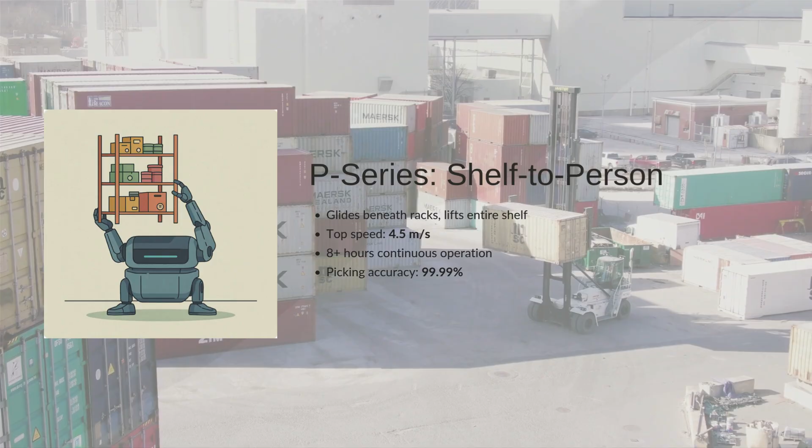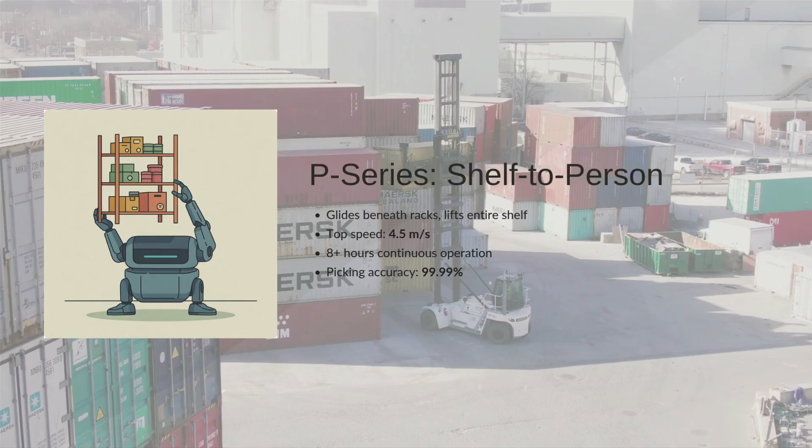These machines operate with incredible speed and endurance. P series robots reach top speeds of 4.5 meters per second and can work continuously for over 8 hours under rated payloads. Most importantly, the system eliminates human travel time and achieves a near-perfect picking accuracy of 99.99%.

For warehouses that manage a vast variety of small items, storage density is the top priority. To solve this, Geek Plus developed the RoboShuttle system, a tote-to-person solution that utilizes the tall RS series robots.

These machines feature tall vertical columns equipped with double forked retrieval arms. Unlike standard rolling AMRs, RoboShuttle robots can reach heights of up to 11 meters, driving down narrow racking aisles and retrieving individual totes directly from high bay shelves.

The robots retrieve multiple totes on a single run and transfer them to standard P series robots, which then ferry the totes to picking stations. This hybrid setup maximizes vertical space utilization.

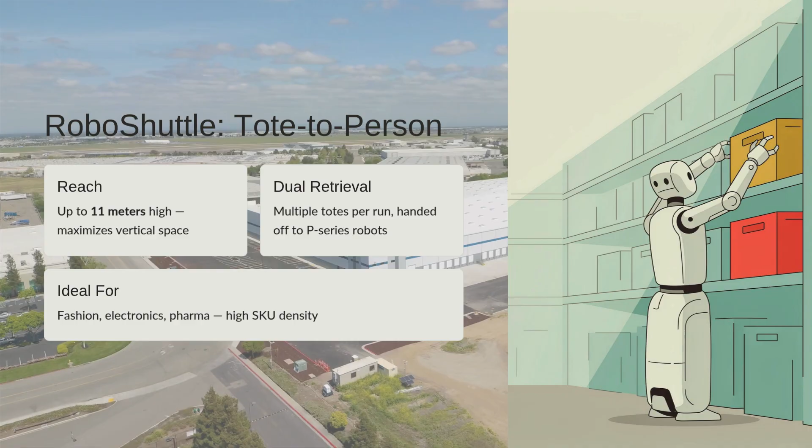It is ideal for industries like fashion, retail, electronics, and pharmaceuticals. In these sectors, facilities must store hundreds of thousands of different SKUs in a compact, organized footprint.

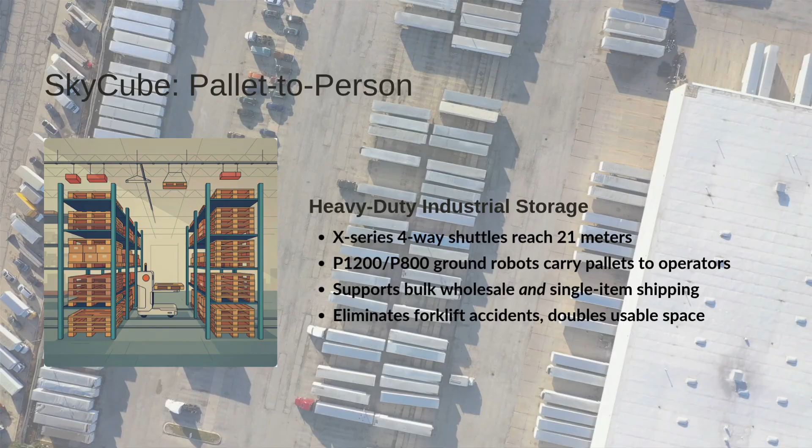When a warehouse must handle heavy palletized material alongside standard individual items, they require the SkyCube system. This pallet-to-person solution is designed for heavy duty industrial storage, combining an automated storage structure with rolling ground robots.

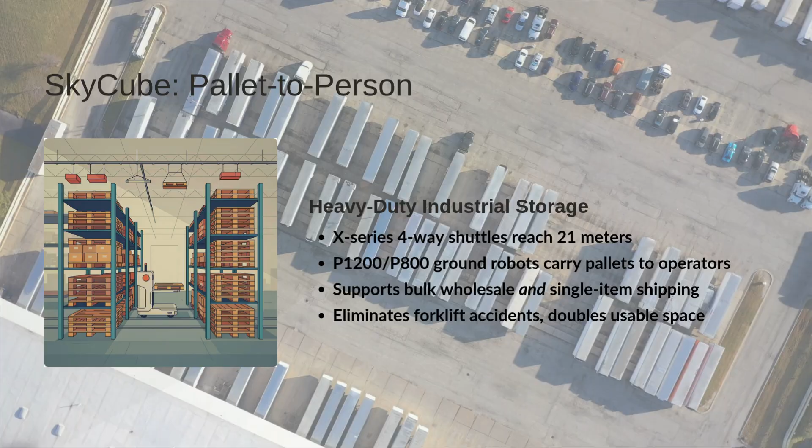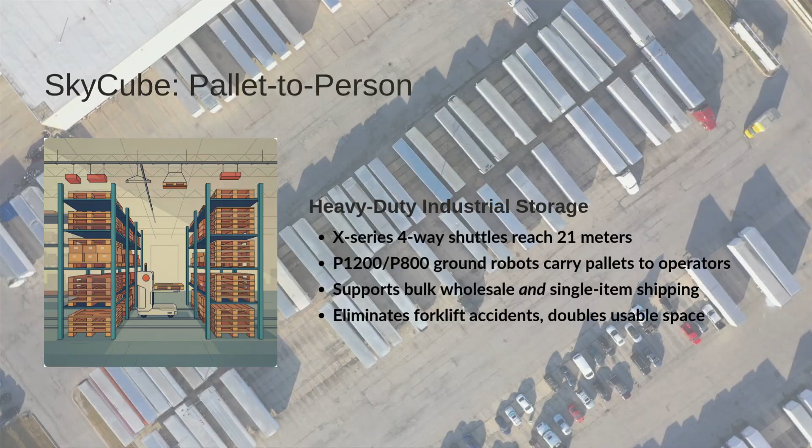In the upper levels of the racking structure, X series four-way shuttles glide along rails, storing and retrieving entire pallets at heights of up to 21 meters, utilizing the full vertical clearance of the building.

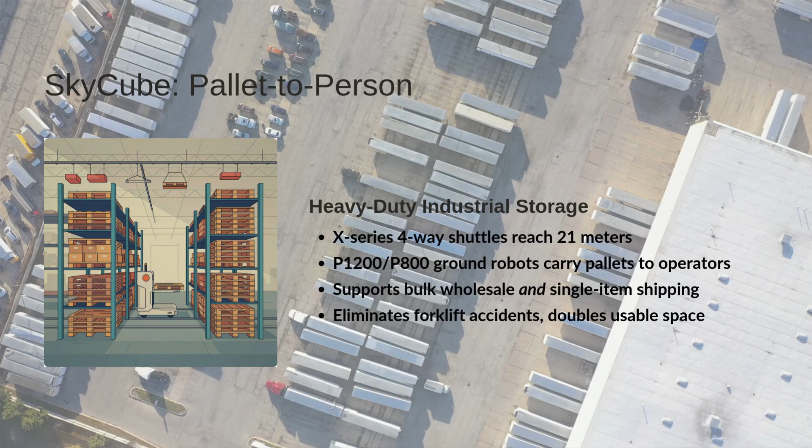When a pallet is needed for picking, the shuttle delivers it to a vertical lift, which lowers the pallet to the ground. There, a ground level AMR such as the heavy-duty P1200 or P800 retrieves the pallet and carries it to an operator.

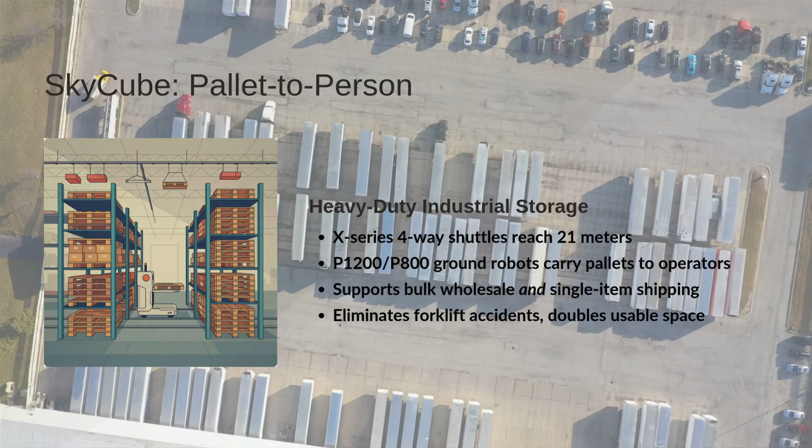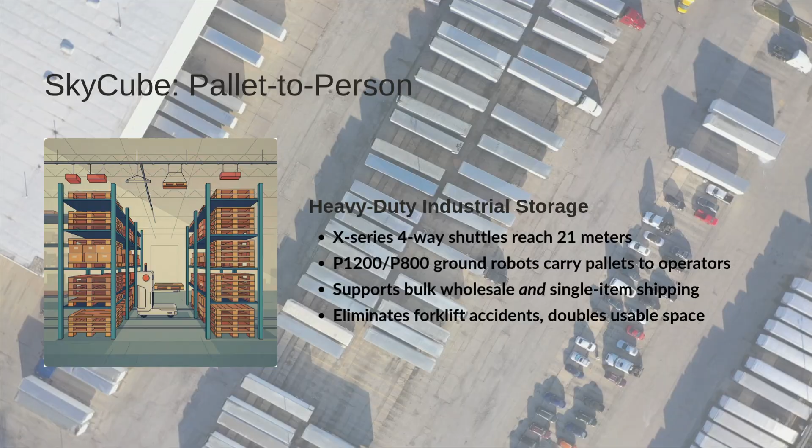This unified system supports both bulk wholesale fulfillment and detailed single item consumer shipping in a single high density footprint. It completely eliminates forklift accidents and reduces labor intensity while doubling usable space.

E-commerce distribution hubs and postal couriers handle a relentless stream of outgoing parcels. They require rapid, flexible sortation. Geek Plus addresses this with its Fleet Sort solution.

It then glides across a flat floor toward the correct chute. Traditional sorting systems require expensive, permanent steel platforms. Fleet Sort operates at ground level with no fixed infrastructure.

This makes it incredibly easy to install and expand. Companies can scale up sorting operations simply by adding more S series robots to the floor during peak seasons, boosting parcel throughput up to 10 times without heavy construction.

Beyond warehouse picking and sorting, industrial factories require flexible material transport. Geek Plus smart moving solutions automate these transit tasks. This segment utilizes the M series latent mobile robots and the F series autonomous forklifts.

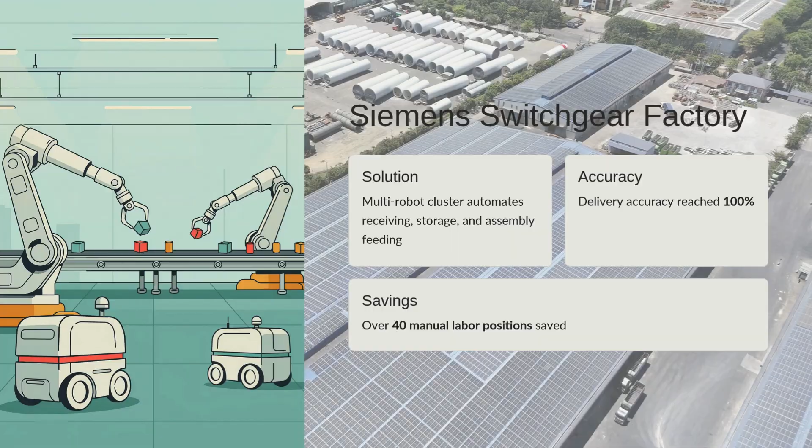In the manufacturing sector, lean material flow is vital to keep production lines running smoothly. Shanghai Siemens Switchgear Co. Limited achieved this by partnering with Geek Plus. In a phased rollout, Siemens upgraded its flexible intelligent factory with four types of Geek Plus robots. The multi-robot cluster solution automates the entire logistics chain, including raw material receiving, in-store stock management, and production line feeding.

Geek Plus MP1000 robots deliver materials for circuit breakers based on real-time assembly demands. This precision logistics model reduced the space required next to production lines by half. The factory's delivery accuracy reached an incredible 100%. Furthermore, the automated solution allowed Siemens to save over 40 manual labor positions, significantly lowering manufacturing operational costs while ensuring continuous, uninterrupted production across complex and dynamic manufacturing floors.

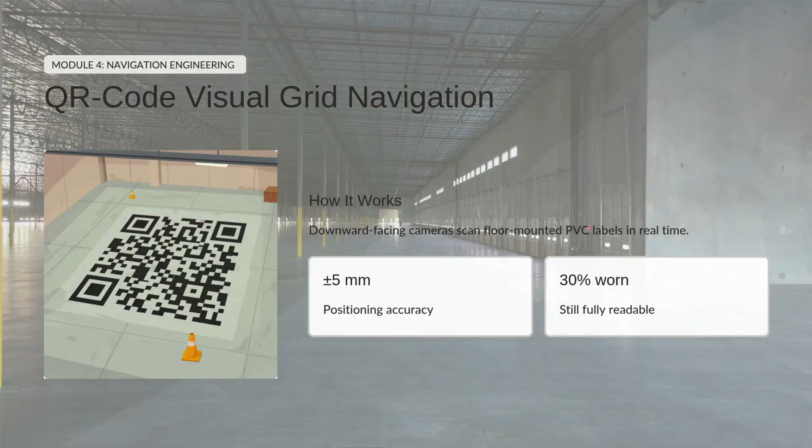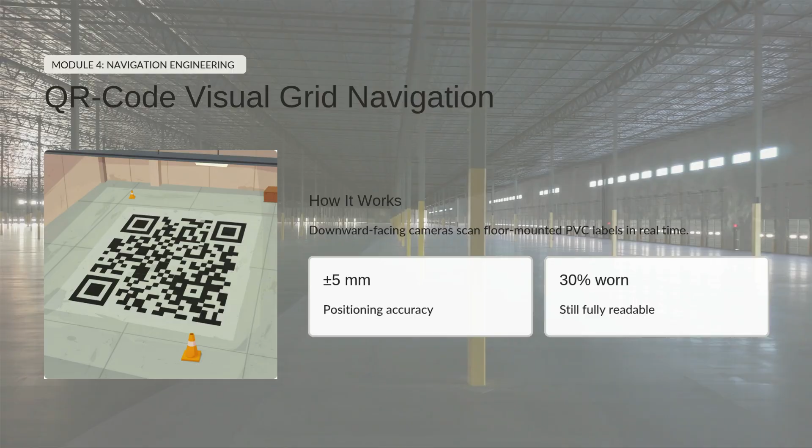To move safely and efficiently, warehouse robots must navigate with extreme precision. The most common and cost effective navigation method is the QR code visual grid. In G2P zones where human foot traffic is restricted, a grid of QR codes is laid on the floor. Downward facing cameras on the AMRs scan these labels in real time, allowing the robots to track their exact location.

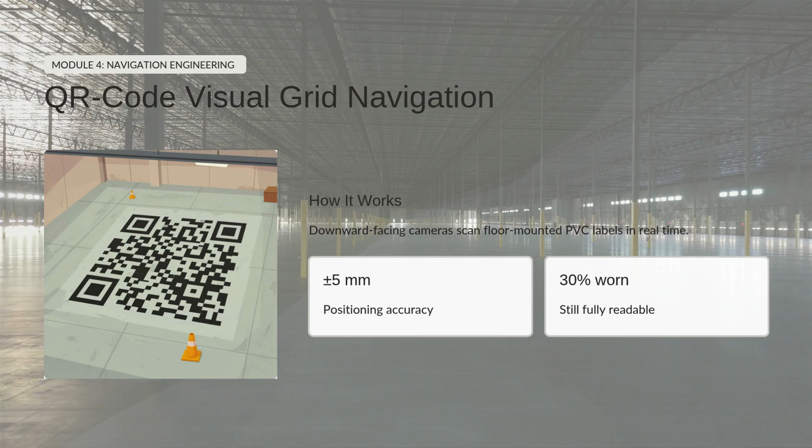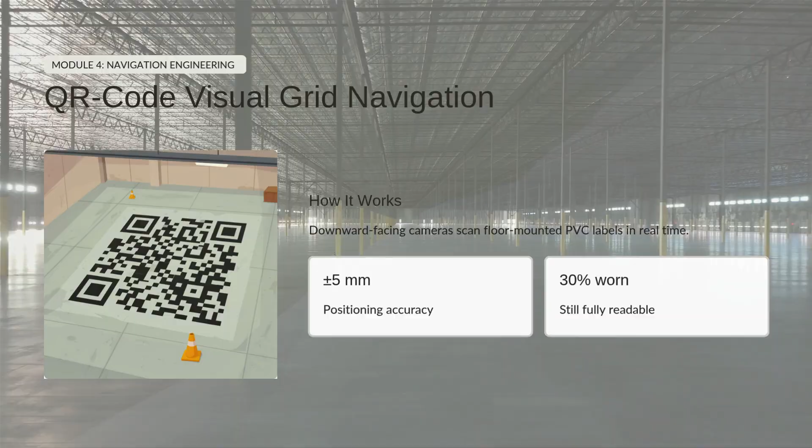The physical labels are typically compact PVC plates secured with heavy duty adhesive. They are highly resistant to water, dust, and wear, remaining fully readable even if up to 30% of the surface is scratched or covered in dust. This navigation method provides a high positioning accuracy of 5 millimeters. This precision is essential to prevent tracking errors when AMRs carry heavy payloads of up to 1,200 kilograms.

While QR codes are excellent for structured zones, they are difficult to maintain in heavy traffic environments.

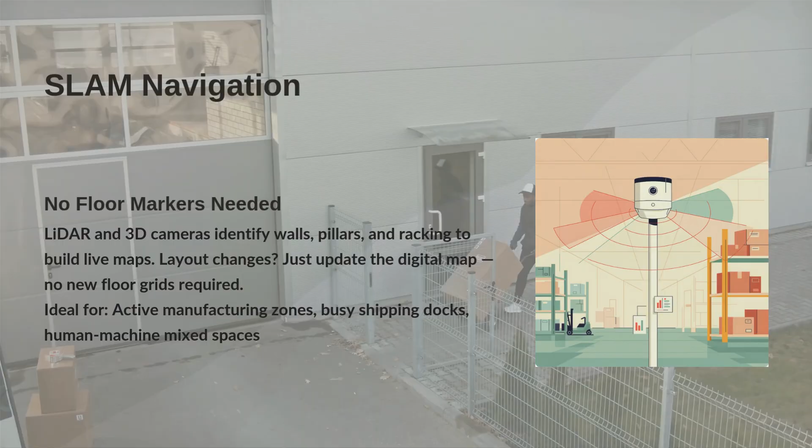In dynamic human machine mixed spaces, Geek Plus utilizes SLAM navigation, which stands for Simultaneous Localization and Mapping. This advanced technology allows robots to navigate without physical floor markers. Instead, the AMR uses its onboard LiDAR and 3D cameras to scan the surrounding environment. It identifies natural landmarks such as walls, pillars, and racking columns to calculate its position in real time. This gives the robot extreme flexibility.

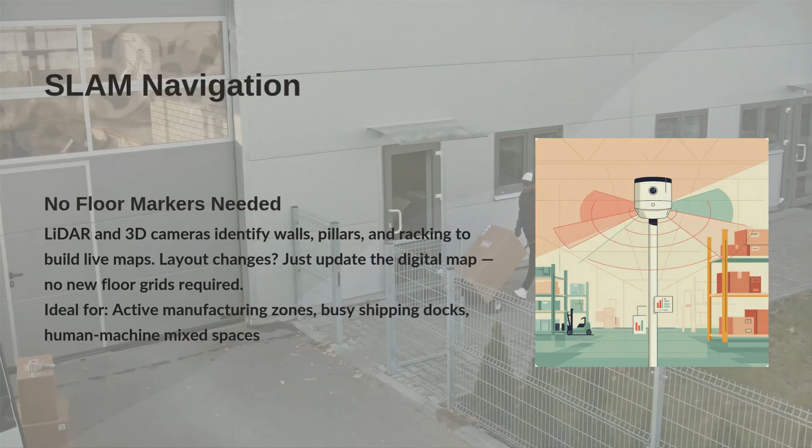If a factory layout changes or a production line is adjusted, engineers do not need to lay new floor grids or paint magnetic lines. They simply update the digital map in the software suite. This makes SLAM navigation the ideal choice for active manufacturing zones and busy shipping docks.

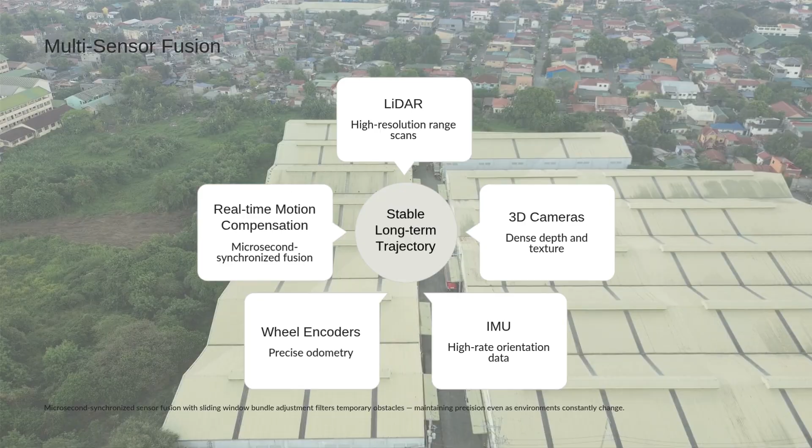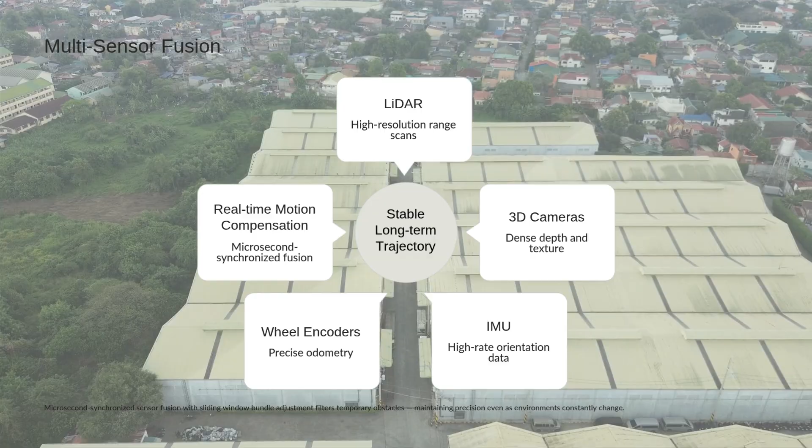Industrial factory floors are incredibly challenging environments for robotic sensors. Surroundings change constantly as materials are moved and employees walk by. To maintain precise positioning, Geek Plus AMRs employ a closely integrated multi-sensor framework. A high-speed processor fuses real-time inputs from LiDAR, 3D cameras, inertial measurement units, and wheel encoders. This sensor fusion is synchronized down to the microsecond.

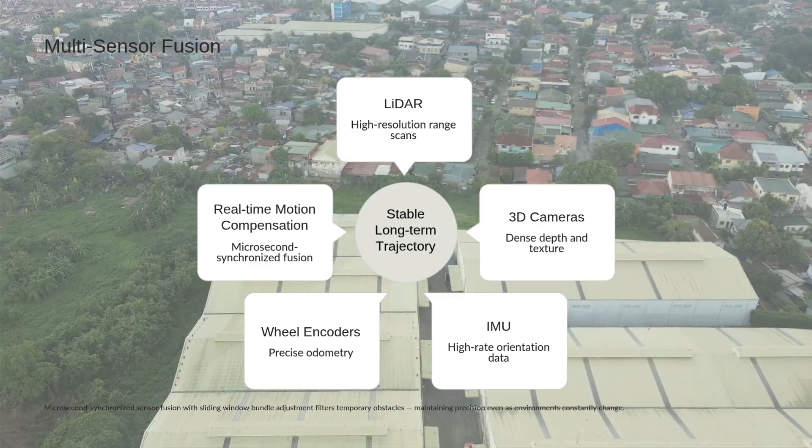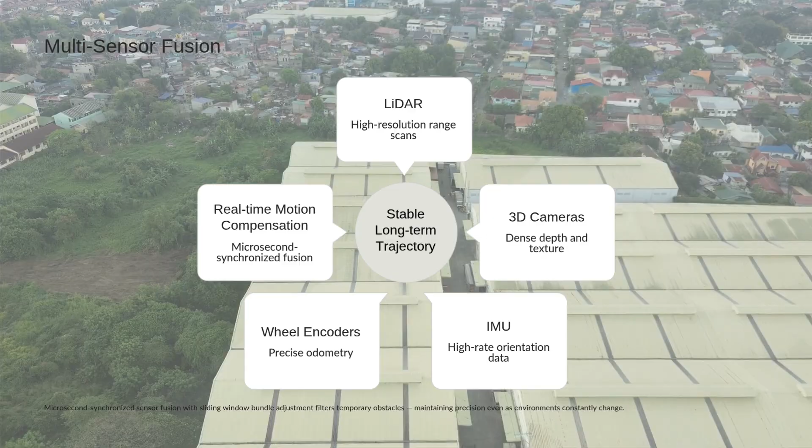Additionally, rotating LiDAR sensors can experience scan distortion when the AMR moves at high speeds. Geek Plus's SLAM algorithm resolves this by using IMU and wheel speed data. Furthermore, the mapping software uses sliding window, bundle adjustment, and marginalization. This allows the robot to automatically filter out temporary obstacles. It maintains trajectory accuracy over months of active floor runs, ensuring stable operation even when environmental layouts change constantly.

To build high quality AMRs at scale, Geek Plus constructed a groundbreaking manufacturing facility in Nanjing. This is the world's first smart factory where robots manufacture robots. The Nanjing facility replaces traditional static conveyor assembly lines with a flexible island production mode. In this setup, autonomous mobile robots carry components between decentralized assembly stations, while robotic arms, automatic tightening machines, and smart cameras work in sync to assemble new robots.

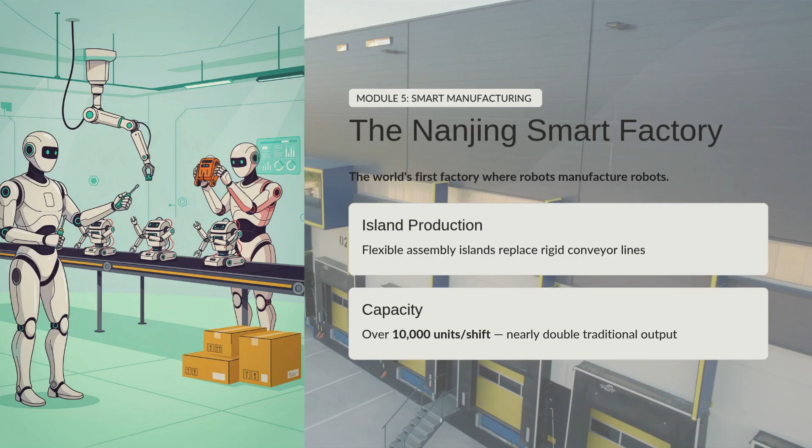This flexible model allows Geek Plus to quickly adapt to customization requests and shorter product life cycles. It also doubles the factory's production capacity compared to traditional manual lines, reaching an annual capacity of over 10,000 units per shift. The Nanjing smart factory serves as a brilliant showcase, proving the value of mobile robotics by applying the technology directly to Geek's own volume manufacturing processes.

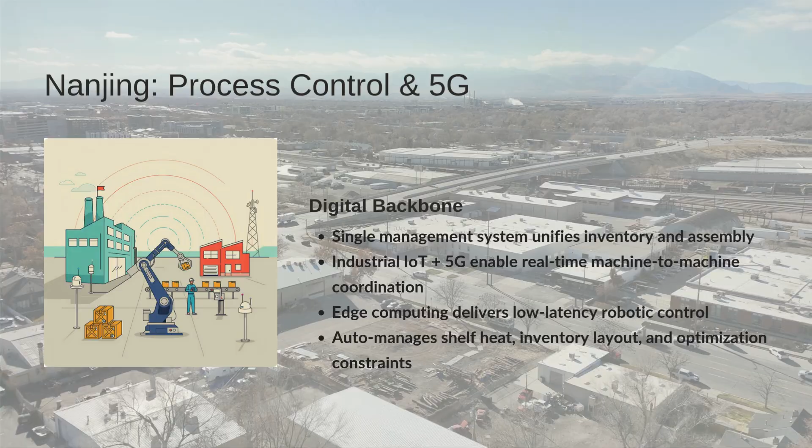Operating a fully automated factory requires a powerful integrated software backbone. The Nanjing facility utilizes the Geek Plus production logistics management system. This system unifies the management of inventory, storage, and active production lines. It connects the warehouse area with the assembly zone to ensure a seamless flow of parts.

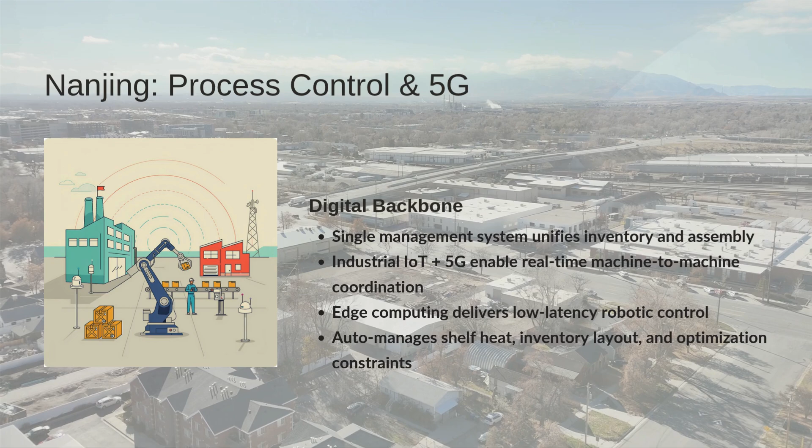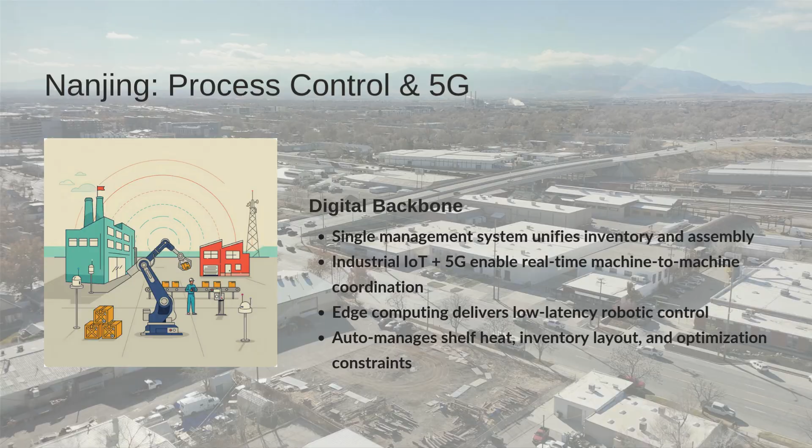To coordinate this complex process, the facility leverages industrial IoT sensors and high speed 5G wireless connectivity. This enables real time machine to machine communication across the board. Combined with edge computing, the local manufacturing execution system can control robotic movements with minimal latency. This digital network ensures that materials are delivered to assembly islands precisely when needed.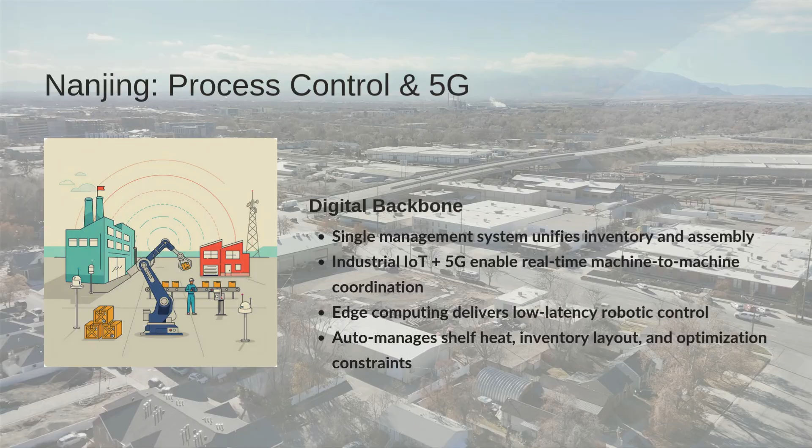The smart operating software automatically manages inventory layouts, optimization constraints, and shelf heat parameters in real time. This unifies diverse fleets into a single cohesive manufacturing flow.

Beyond boosting production volume, the automated systems at the Nanjing facility ensure exceptional quality control. Human assembly lines are vulnerable to fatigue and physical errors. The robotic assembly islands execute tasks with absolute repeatable precision. This high accuracy has allowed the factory to achieve a straight-through assembly pass rate exceeding 98%, minimizing the need for manual rework and product repairs.

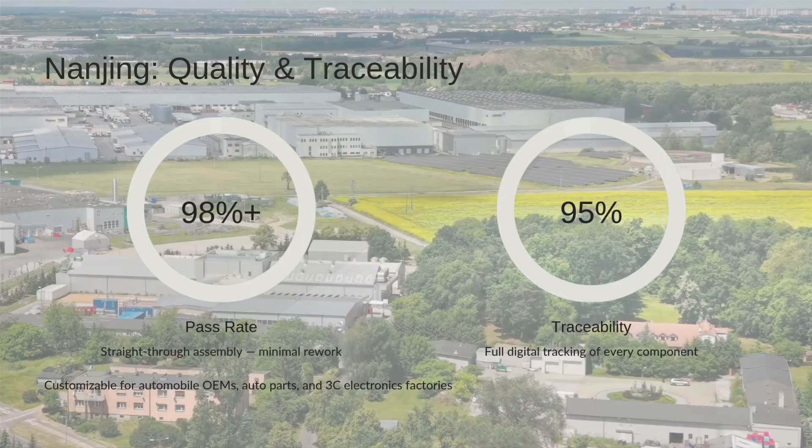Additionally, the integrated software provides full digital tracking, achieving an outstanding material traceability level of 95%. Every single component in a new AMR is recorded and tracked. This deep data transparency optimizes inventory management, reduces waste, and lowers the factory's overall management overhead cost. It is customizable to automobile OEMs, auto part factories, and 3C electronics factories, providing concrete business cases for complete industrial automation in modern manufacturing environments.

While Nanjing focuses on flexible assembly technology, the Hefei facility serves as Geek's primary center for volume production and global export preparation. This massive base builds and tests thousands of AMRs before shipping them overseas.

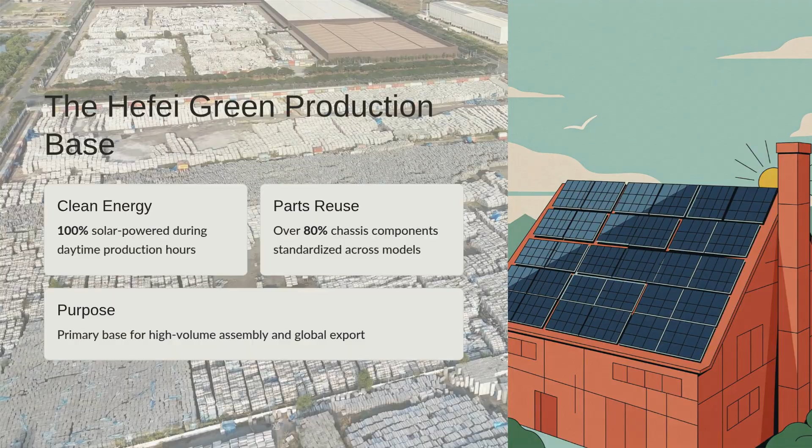To align with modern sustainability goals, the Hefei facility operates under a comprehensive ESG program. The factory integrates solar photovoltaic technology on its roof, allowing the facility to achieve 100% clean renewable energy usage during daytime production hours.

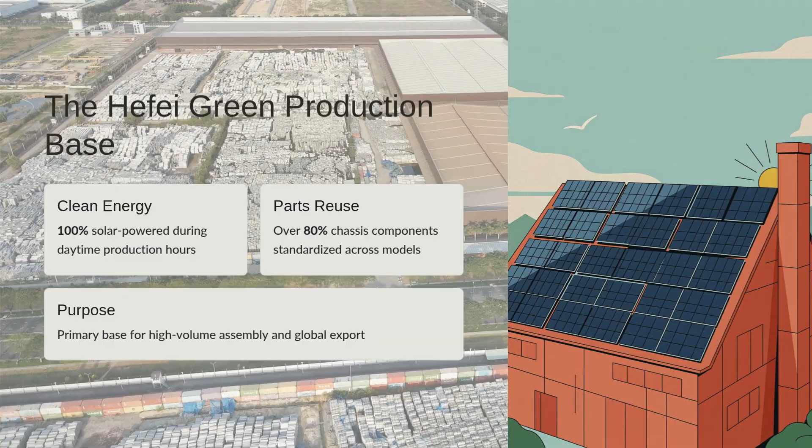To reduce material waste, Geek Plus engineers have standardized their designs, achieving over 80% chassis parts reuse across different robot models. Standardized robots drive directly into the factory's calibration area. They undergo final parameter setup, visual inspection, and severe environmental simulation testing under load before unboxing and international shipment, establishing a new global benchmark for sustainable green logistics.

While the technology matures, the international robotics market is facing sudden geopolitical challenges. On July 28, 2026, the landscape changed significantly under Public Notice DA 26786. The United States Federal Communication Commission added foreign produced advanced robotic devices to its covered list. This regulatory action restricts the import, marketing, and sale of new robotic models that do not already hold an FCC equipment authorization.

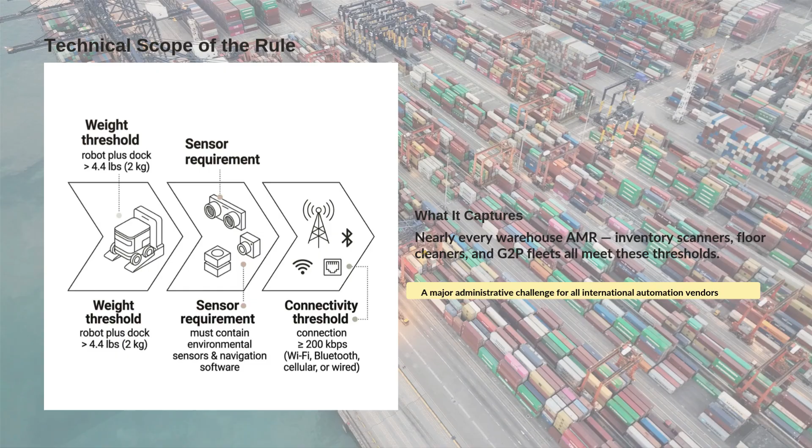Connected ground robots collect sensitive spatial data, camera feeds, and facility layouts. This regulatory shift represents a concerted effort by the US administration to secure its logistics networks, protect privacy, and encourage domestic manufacturing. To understand the impact of this regulation, we must examine its precise technical definition.

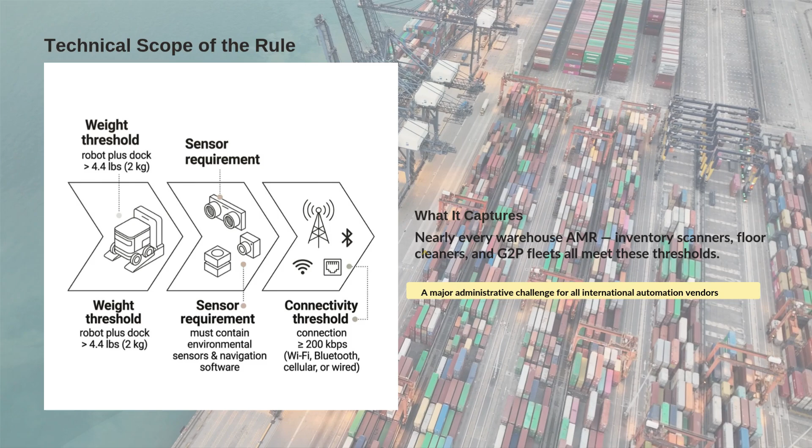The FCC covered list update is far wider than humanoid robots. It applies to any ground based mobile device that meets a specific set of thresholds. First, the combined weight of the robot and its docking station must exceed 4.4 pounds, or roughly 2 kilograms. Second, the device must contain environmental sensors and navigation software.

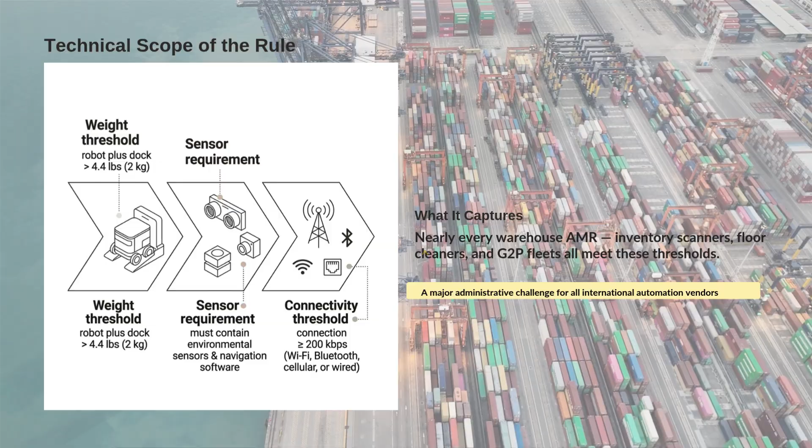Third, it must possess a component providing network connectivity of at least 200 kilobits per second. This includes wired, Wi-Fi, Bluetooth, or cellular connections. This technical definition comfortably captures almost every autonomous mobile robot used in warehouse logistics.

While the FCC regulation is broad, it contains several important exclusions that protect specific industries. The legal definition never turns on human shape; it focuses strictly on mobile ground autonomy. Consequently, fixed stationary industrial robotic arms are explicitly excluded. This includes multi-axis articulating SCARA and gantry arms bolted to factory floors.

Medical devices regulated under separate health and safety acts are also exempt. This includes surgical robotic systems, prostheses, and powered wheelchairs. Furthermore, unmanned aerial vehicles and drones are not covered, as they are regulated under separate restrictions. Finally, standard connected road vehicles and trains are excluded. If your automation is a bolted down arm on a production line, this rule does not touch it.

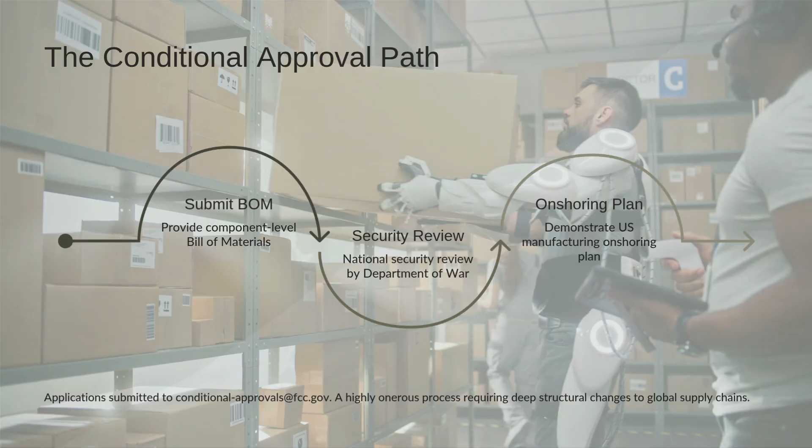For new uncertified foreign robot models, there is only one path back into the United States market. The regulations build in an administrative escape hatch called conditional approval, and any entity involved in producing the device, including OEMs and contract manufacturers, can apply.

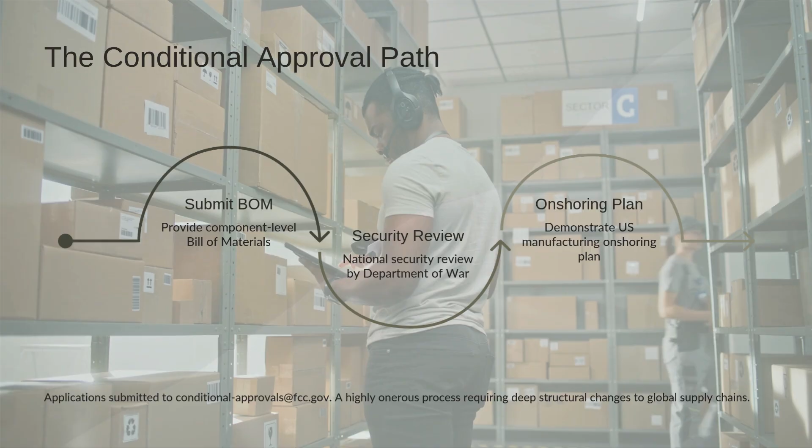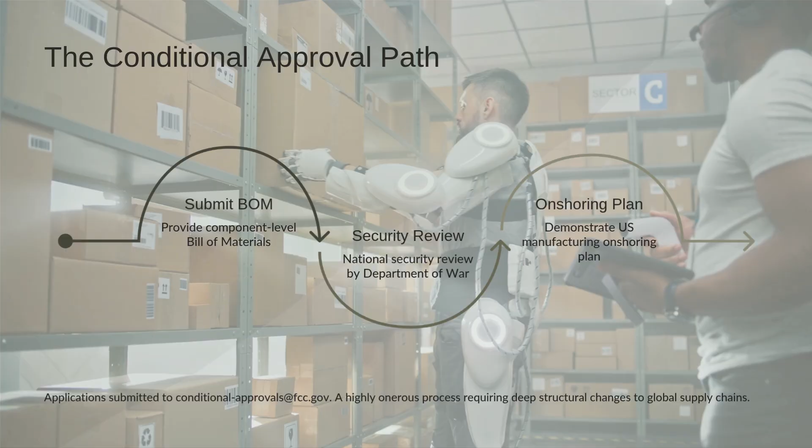However, this is not a simple administrative exercise. The application process is highly onerous and complex. It requires applicants to submit an exhaustive component level bill of materials. It also includes a section evaluating the vendor's plan to onshore their manufacturing. To receive approval, companies must demonstrate clear plans to move assembly operations onto United States soil.

Applications are emailed to conditional approvals at fcc.gov, which then forwards the package to the Department of War for a formal national security review. This transition plan requires deep structural changes to global logistics, supply chain, and manufacturing investments.

The FCC import restrictions are accelerating a major decoupling of the global robotics supply chain, because the regulation is determined by the country of production rather than the manufacturer's corporate nationality. It impacts any foreign assembled hardware. This trade barrier has effectively closed the US market to many new rapid iteration models.

Consequently, Chinese robotics exporters are redirecting their sales efforts. They are focusing heavily on markets without equivalent trade restrictions, primarily the United Kingdom and continental Europe, while the US focuses on supply chain security and reshoring. British and European retailers are actively embracing these cost competitive systems.

As mobile robots become more advanced, they capture massive amounts of sensitive information. They gather continuous video footage, spatial layout data, and detailed maps of commercial facilities. This data density raises concerns about cyber vulnerabilities and data sovereignty.

To protect client data in sensitive commercial environments, robotics manufacturers must prioritize robust security. Geek Plus addresses this by operating an information security management system certified to the strict ISO IEC 27001:2022 international standard. This compliance framework provides enterprise grade protection across all operational domains.